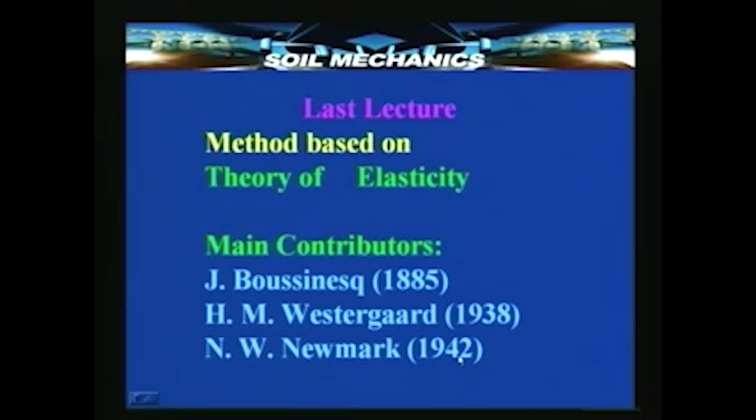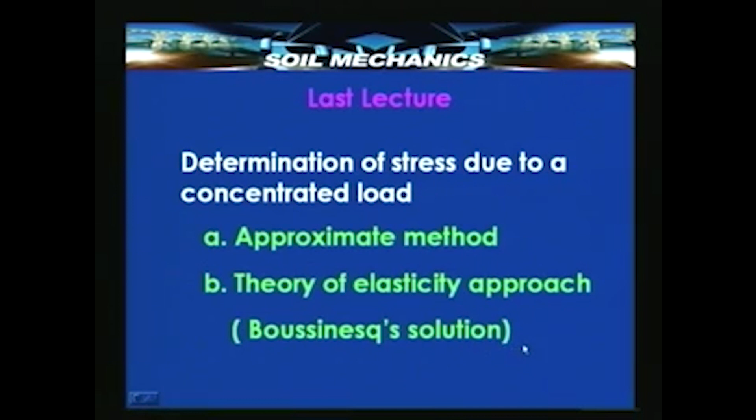We also saw how to compute stresses due to a concentrated load. We saw two broad approaches: one which I called the approximate method, and the other the Boussinesq solution. In the approximate method, we assumed that soil is a particulate material.

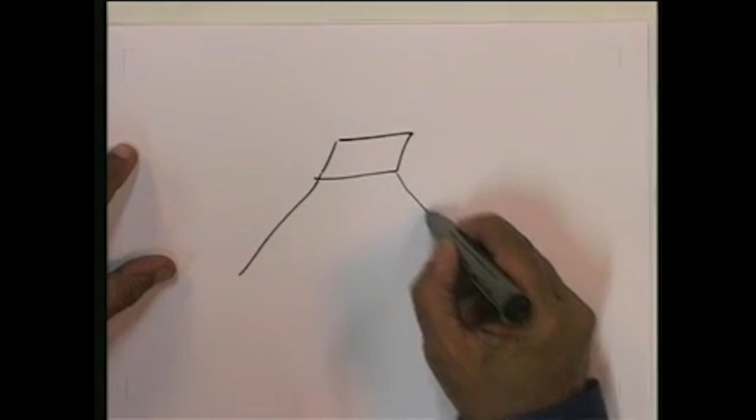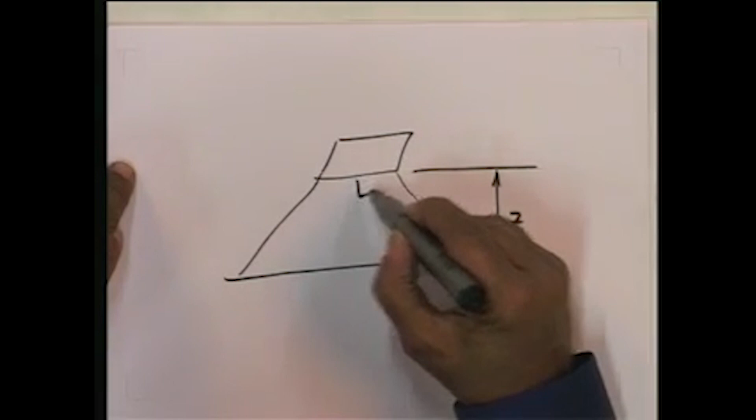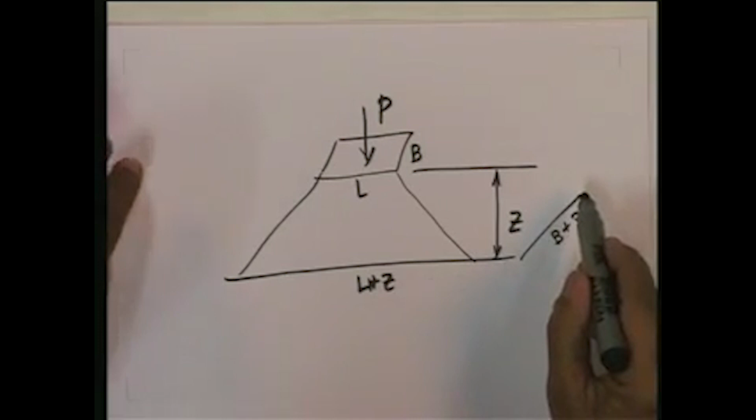The stress from the foundation gets transmitted to the soil through the grains, and in that process it disperses. If this is the foundation, the soil distributes the stress such that at any depth z, the area over which the stress gets distributed is no longer length into breadth, but length plus depth into breadth plus depth. So if there is a load P here, it gets uniformly distributed over this area of L plus Z into B plus Z. This is an approximate method because the actual boundary line of the distribution area is approximate.

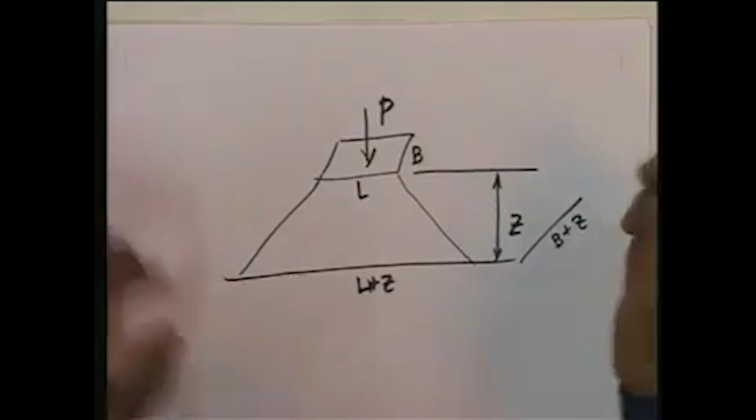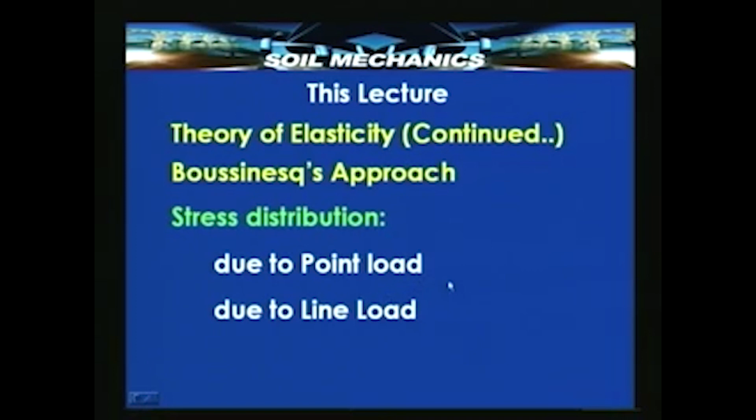On the other hand, the Boussinesq solution takes a different approach, based on the theory of elasticity. Let us see in today's lecture how to use Boussinesq's approach for computing stress distribution, first due to a point load and then due to a line load.

Let us briefly recapitulate what theory of elasticity is all about. Although we covered it in the last lecture, it is necessary to go through this briefly so we can appreciate Boussinesq's theory a little better. We started with the assumption that soil is a semi-infinite medium or half space. It is a continuum, meaning there is no break, although the medium consists of granular material with distinct boundaries between the grains - we assume this to be a continuum.

Next, we assume the medium to be homogeneous. The advantage is that every element of the medium is similar to any other element - if we understand the behavior of one element, we can extrapolate it to all other elements and hence to the entire half space. That is the idea of assuming homogeneity, and it considerably simplifies the problem. In nature, it may be difficult to find perfectly homogeneous material, and we will see later how non-homogeneity can be included.

We also assume the soil has equal properties in all directions, that is, isotropic. Most importantly, we assumed the soil has no weight, meaning there were no initial stresses and no initial deformation. The idea is that we can calculate the stress in the medium purely due to the applied stress from a foundation. The self-weight of the soil, which contributes a stress by itself, can always be computed if we know the depth and unit weight of the soil, and therefore theory of elasticity need not be used for computing stress due to weight.

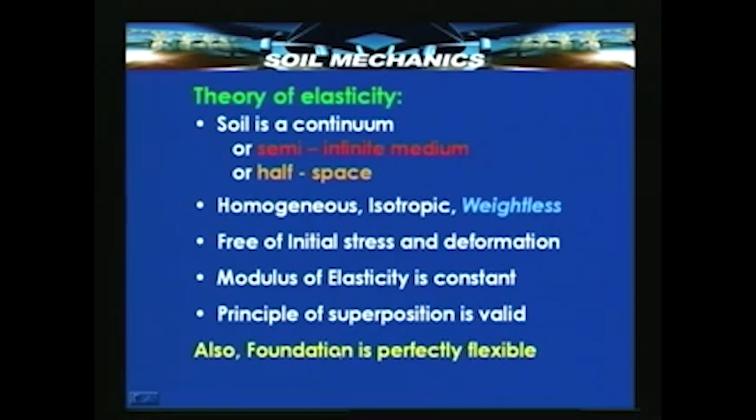Then modulus of elasticity is assumed to be constant, as are Poisson's ratio and other elastic constants. Lastly, the principle of superposition is valid - meaning if more than one load is applied to the foundation, the stress due to each load is added to the stress due to the next, so we apply the principle of superposition. We have also assumed that the foundation is perfectly flexible, so that the contact pressure at the interface between the foundation and the soil is uniform.

Now, all these assumptions and their importance has been laid out very clearly both in the last lecture, and I have emphasized it again this time. Now, are they really applicable? A question automatically arises in the mind. Are we oversimplifying the problem? Are we justified in making these assumptions? Are they really acceptable? Well, to some extent they are acceptable.

To a great extent, application of this theory in practice has vindicated our stand that it is reasonable to assume the soil to be homogeneous, isotropic, a continuum, and also elastic in nature. The validity of these assumptions used in the method of computing stresses has been borne out by trials in the field, and therefore we can justifiably say that the method can be used with reasonable confidence in practice.

However, it must be noted that there can be deviations from the conditions which have been assumed. If there are deviations, we shall have some approximate way of accounting for those deviations, using as a basis the expressions which we will be deriving from these assumptions. That is, we will derive a set of equations or expressions for this ideal situation, and any deviation from this will be accounted for in some empirical way.

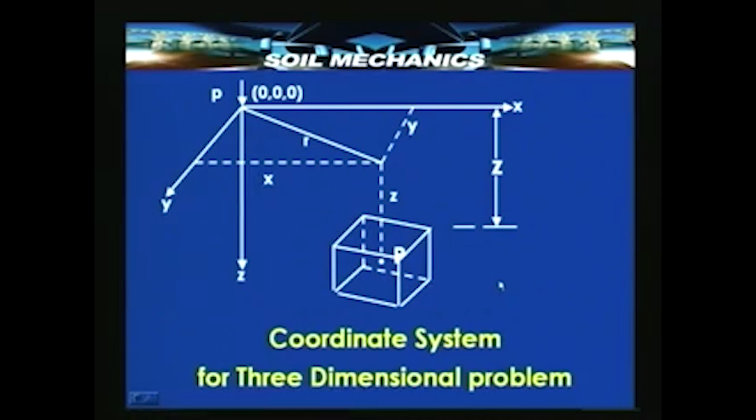We were taking a look at the fundamentals of the theory of elasticity yesterday. The theory of elasticity assumes 4 or 5 major tenets. Number 1, it says that the material is in equilibrium. A typical element inside the soil is in equilibrium under the action of the stresses which are acting on it.

Now, this is an essential condition and a justifiable condition, because in practice we want safety. We want the element to be in equilibrium, therefore the foundation will be in equilibrium and hence the superstructure. Therefore, it is a perfectly valid, justifiable requirement to state that equilibrium must be satisfied by the element for the set of forces or stresses which will be acting on it.

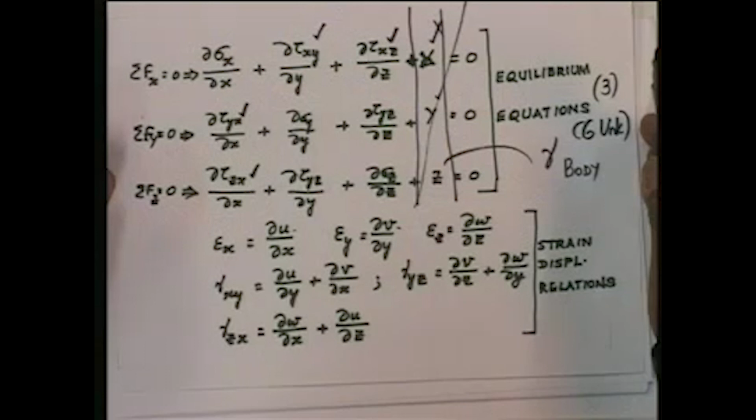Now, we have seen in one of the diagrams earlier that every surface of this parallelepiped is subjected to one normal stress and two shear stresses. Now, if we calculate the forces on each one of these planes and write down the well known equations of equilibrium for sigma Fx equal to 0, sigma Fy equal to 0 and sigma Fz equal to 0, this is what we will get. You can see here I have written three equations.

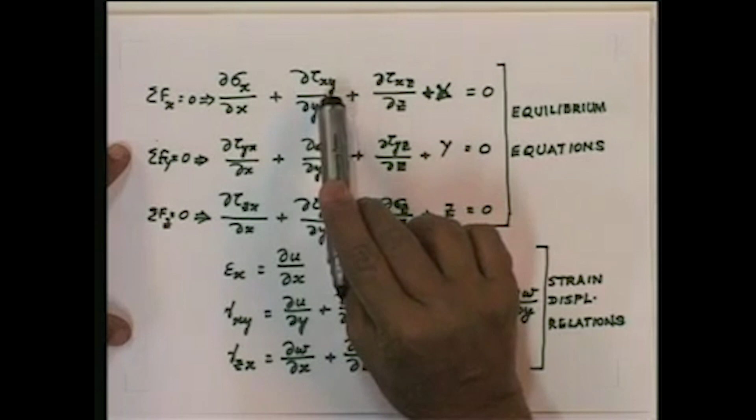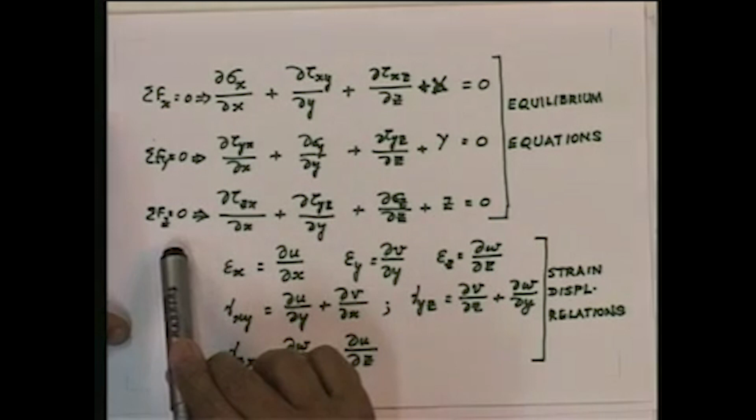One of them says sigma Fx equal to 0, and you find that it has a term which is nothing but the rate of change of sigma x in the x direction, then the rate of change of shear stress tau xy in the y direction, rate of change of shear stress xz in the z direction, plus a so-called body force X in the x direction. This is a force per unit volume, which I mentioned yesterday. Now, if we write equations for Fy equal to 0 and Fz equal to 0, we will get similar equations. All these three together constitute the so-called equilibrium equations of a typical three-dimensional problem of stress distribution.

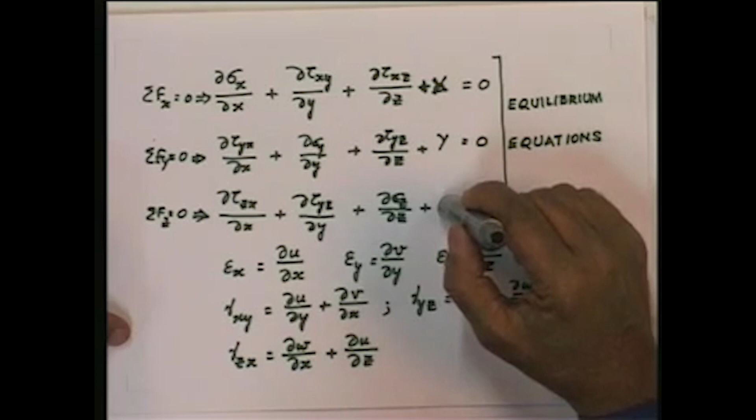In this, if Z is the vertical direction, Z in fact represents the force in the vertical direction per unit volume of the soil, which means it is nothing but the weight per unit volume of the soil, that is, gamma of the soil. Now, we have just made an assumption that gamma, or the medium weight, does not exist. The medium is weightless, which means therefore that we are ignoring the body stresses.

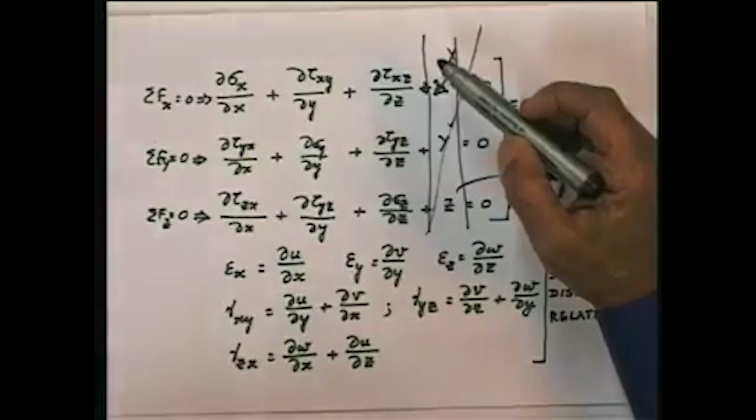We will also be ignoring the stress X, we will also be ignoring the stress Y. That means we shall be ignoring all these body stresses, and then the equations of equilibrium will simplify to merely the rate of change of stresses sigma x, sigma y, tau xy, sigma z and so on. Now, you will see here that there are 3 normal stresses, 6 shear stresses, but if we write and solve the moment equilibrium equations, we will find that tau xy is same as tau yx, tau xz is same as tau zx. We will also find that tau yz is same as tau zy, which means that effectively we will be having 3 normal stresses and 3 shear stresses which are unknowns.

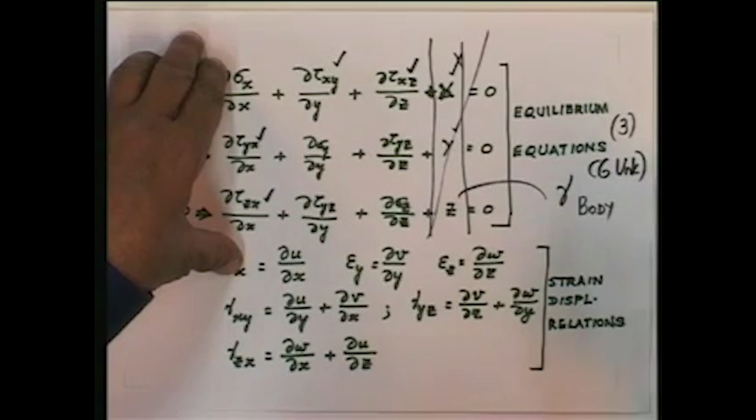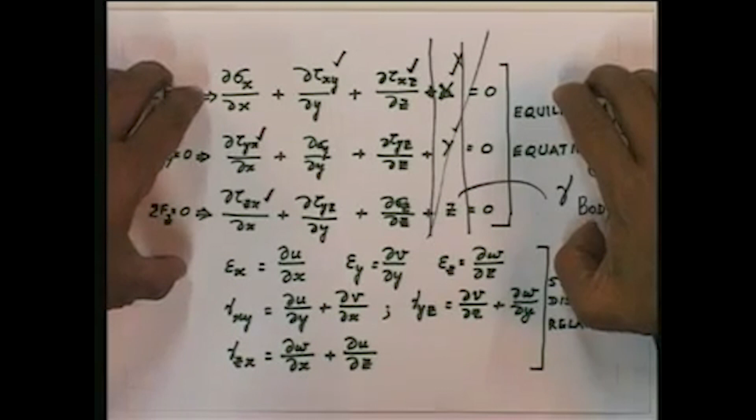We have 3 equations, but we have 6 stresses which are unknowns. So, 6 unknowns, 3 equations. Obviously, equilibrium condition alone will not help us calculate stress distribution, because we have a lesser number of equations and a greater number of unknown stresses.

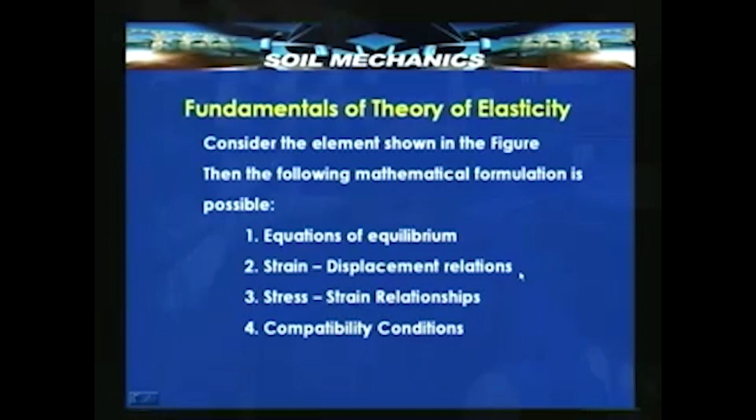We need to consider some other condition as well, and that is why we went yesterday to the second condition shown in this slide, which is the strain displacement relations. What are these? I had explained yesterday that if any typical surface of the parallelepiped is considered, it elongates as well as distorts.

So, there will be normal strains as well as shear strains. On every surface of a parallelepiped there will be 2 normal strains and 1 shear strain, so in a 3-dimensional problem we have normal strains epsilon x, epsilon y, epsilon z, and shear strains, which are variation or deviation in the angle where the original value was 90 degrees. The change in angle of an original 90 degree angle is known as shear strain.

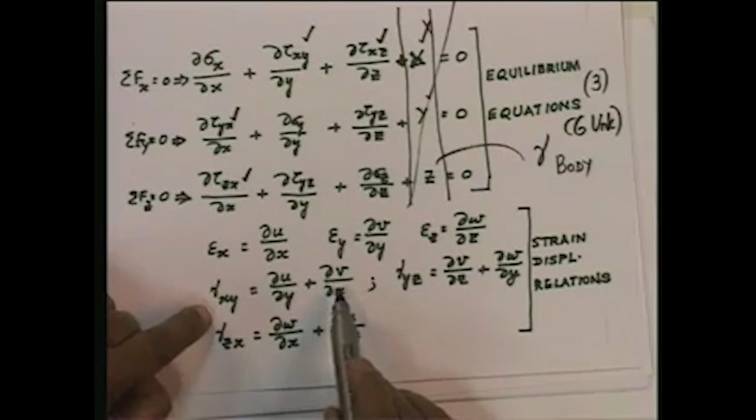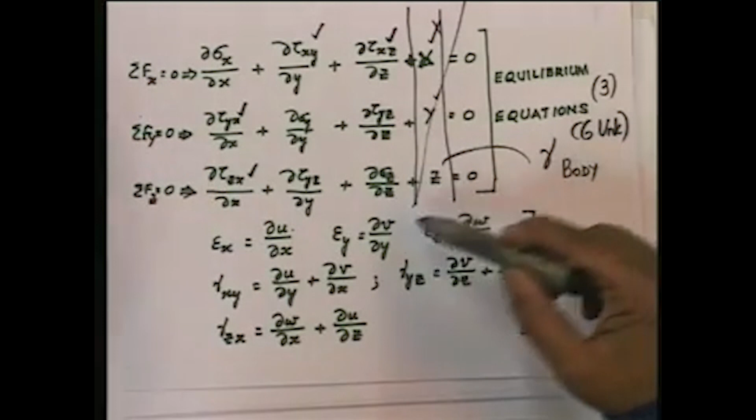It can be shown from geometry that the shear strain will be equal to this expression in the xy plane, this in the yz plane, and this in the zx plane. On the right hand side of all these equations there are notations such as U, V, W, which are nothing but displacements. So effectively now we have strains and displacements related to each other.

After all, strain is nothing but displacement by original length, or change in length by original length, and therefore strain displacement relationships can be expressed as epsilon as a function of U, V, or W, and that is what we have. Now if you see this, once again we have 6 equations, and how many unknowns are there? There are of course 6 strain components, but the displacements are also unknowns, so we have 9 unknowns.

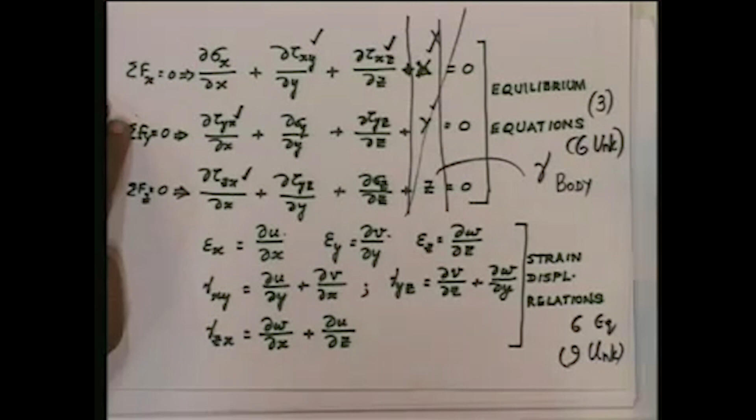So we have 3 plus 6, 9 equations; we have 6 plus 9, 15 unknowns. Obviously we are not yet ready to solve this problem completely to obtain the stresses. Not only that, in the second set of equations there are no stresses, meaning there are additional unknowns coming in the form of strains and displacements. Actually these 15 are the unknowns of this problem - not only stresses, but strains and displacements are also unknowns.

Primarily, in this chapter, we are interested in the stresses, so our basic unknowns are the stresses. However, we need to solve all these equations to finally arrive at the stress values. There are obviously inadequate equations compared to the number of unknowns. Therefore we need to look for additional conditions, but without increasing the number of unknowns, and that is what theory of elasticity does for us.

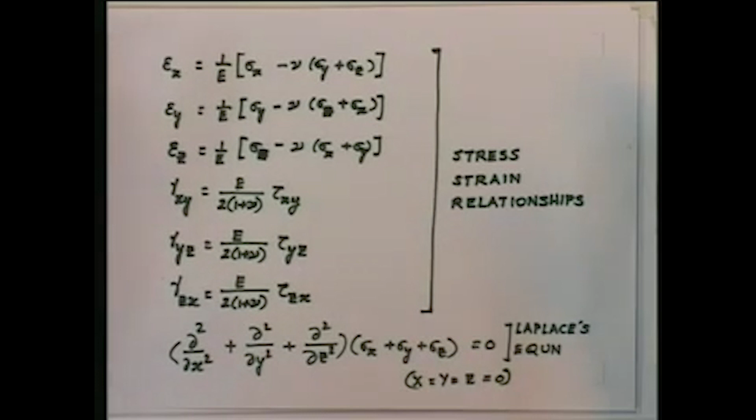Let us see the next transparency. Take a look at this. Here I have written down the stress strain relationships. In the previous two sets of equations, really there was no theory of elasticity coming into the picture - it was all equations pertaining to the equilibrium or the deformation of a typical element in the continuum. Theory of elasticity really enters the picture now.

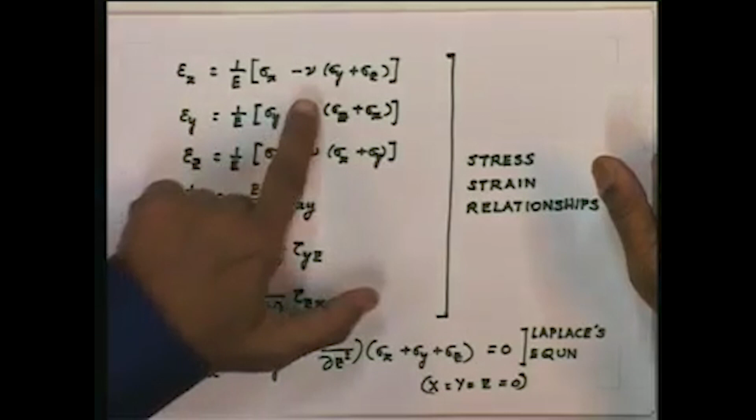Now, the first equation is nothing but strain on the left hand side, modulus of elasticity and all the stresses on the right hand side. Poisson's ratio is also included. This equation is extremely simple to understand and derive.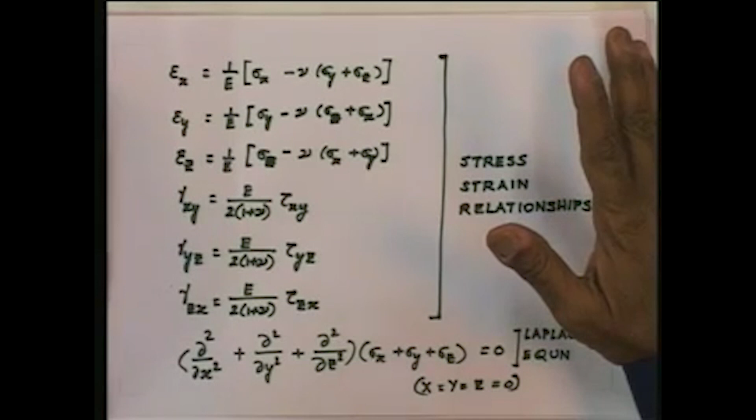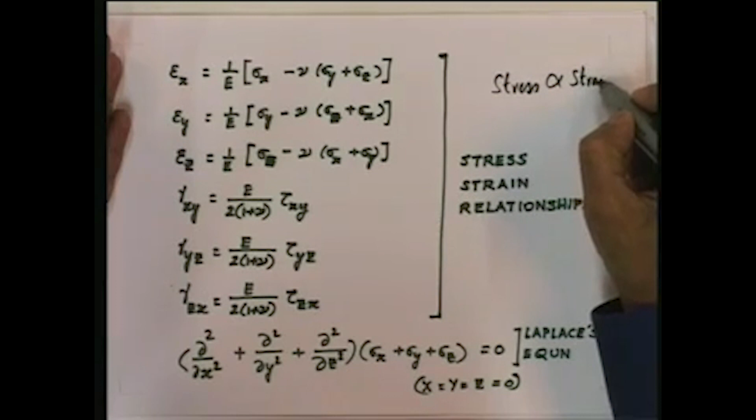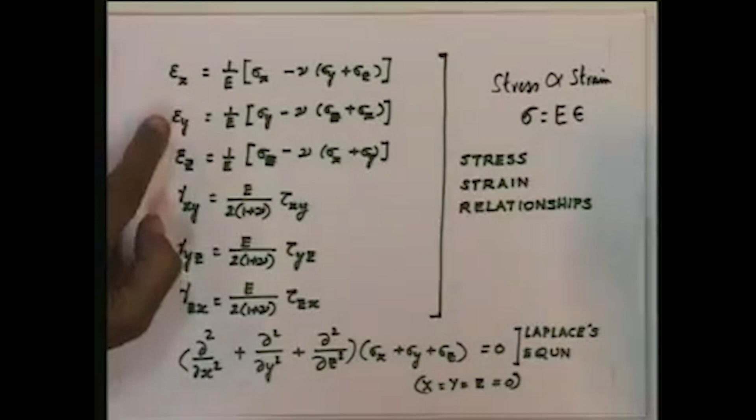Any strain in any direction, according to theory of elasticity, must be equal to the stress divided by the modulus of elasticity. I am simply assuming that stress is linearly proportional to strain, or in other words, sigma equals some constant, which I call the modulus of elasticity, times the strain. Now, epsilon x is the strain in the x direction.

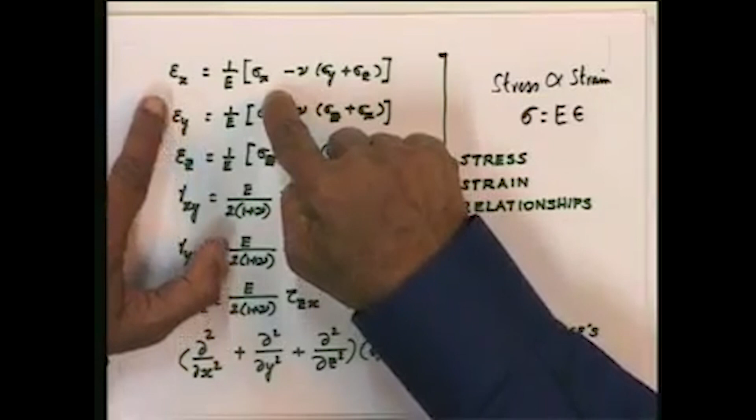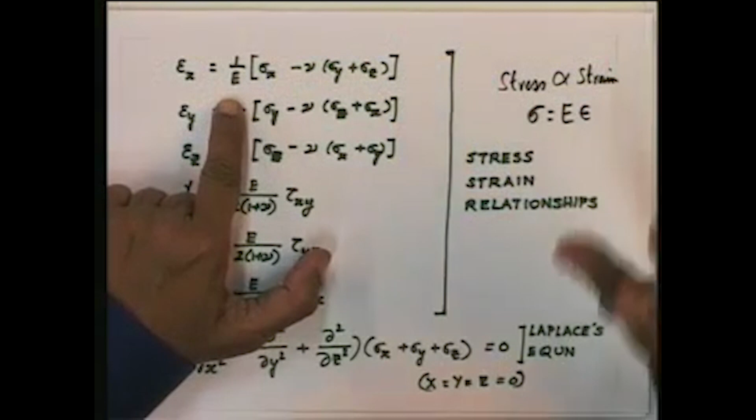It must obviously get a component from the normal stress sigma x, which is also in the same direction as epsilon x. So the component contributing to the normal strain epsilon x will be sigma x upon E. But when dealing with an element, if sigma x is contributing to strain epsilon x, due to the Poisson effect of the material, if it undergoes compression in the vertical direction, it will undergo elongation in the lateral or horizontal direction.

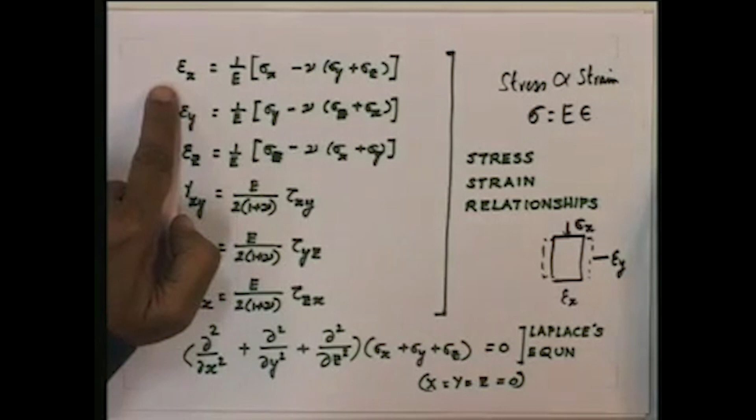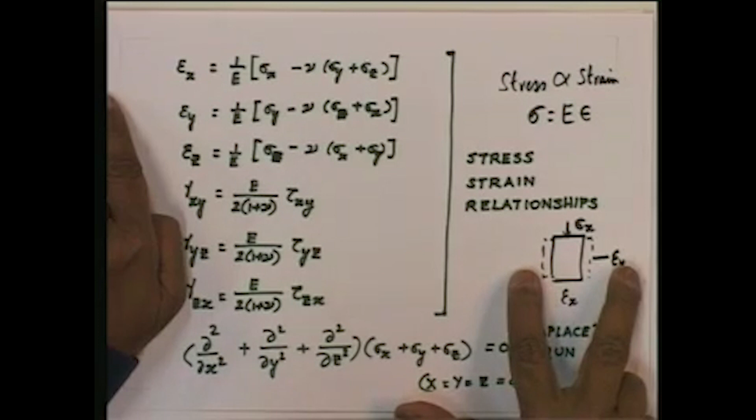This means the stress sigma x is also going to affect the strain in the horizontal direction - if it affects strain in the x direction, due to Poisson effect it will also affect strain in the y direction. Conversely, the stress in the y direction will affect the strain in the x direction through Poisson's ratio, and that is what we have written here. We saw that compression in the vertical direction causes elongation in the horizontal direction. Similarly, if sigma x upon E is a positive contribution to epsilon x, the contribution from sigma y through Poisson's ratio...